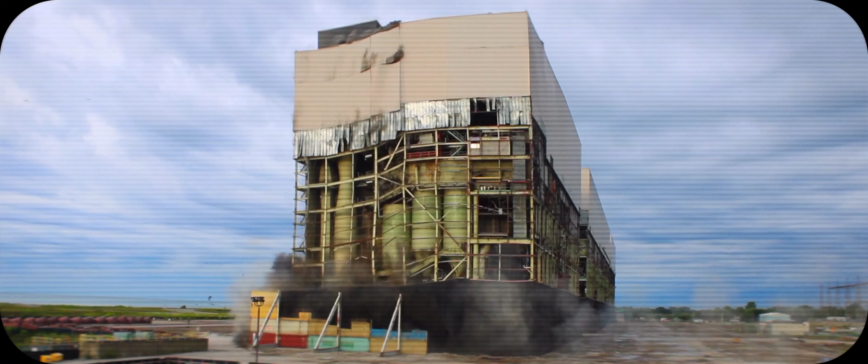Delsan has been at the forefront of the demolition industry for decades, with a long history of successful projects. Only 2 years ago, they worked with Ontario Power Generation to implode the colossal decommissioned Nanticoke Generating Station. In the 2 years since the successful blast, the team has been hard at work on a new project that was previously put on hold, the Lambton Generating Station.

I'm Monica Dedick. I am the Senior Estimator Project Manager and the Assistant Project Manager on the OPG Lambton site. On site, we will be control dropping 4 boiler structures, 3 stacks, the North Stack, South Stack, and Wet Stack, as well as 2 SCR structures.

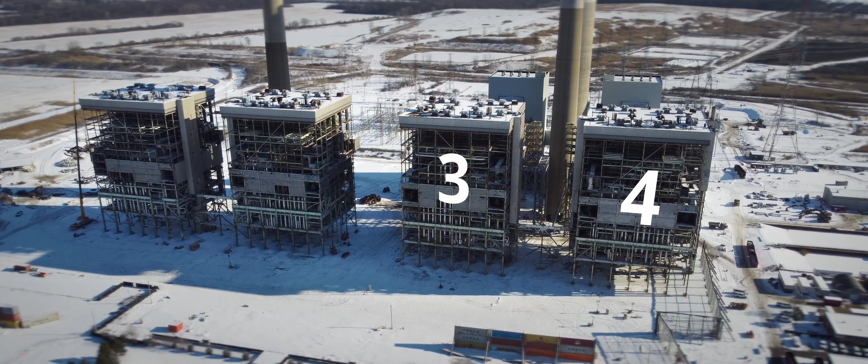The control drop will start with boilers units 4 and 3, then units 2 and 1. Once boilers 4 and 3 are control dropped, then the stacks will be control dropped one after the other. The last stack to be control dropped will be the North Stack.

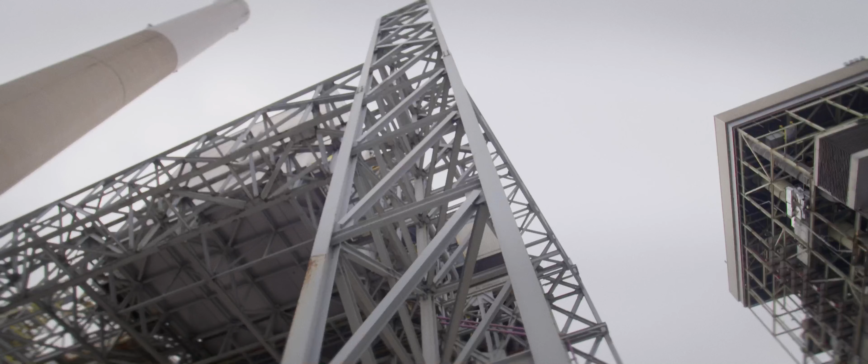My name is Paul Montero. I'm the Health and Safety Manager for Delsan AIM Environmental Services. From a health and safety perspective, this project brought in a lot of unique challenges that we never faced before. This is a very challenging job to this date.

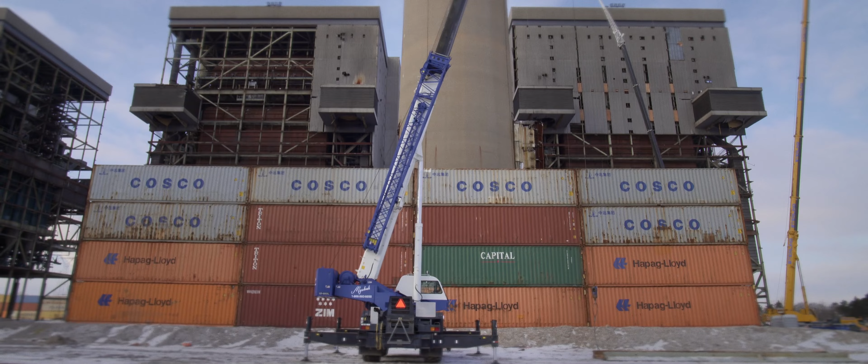We've spent the last year pretty much just cleaning and abating and removing hazardous materials and demolishing some of the buildings that were left behind so that we can make room for the implosion that's upcoming.

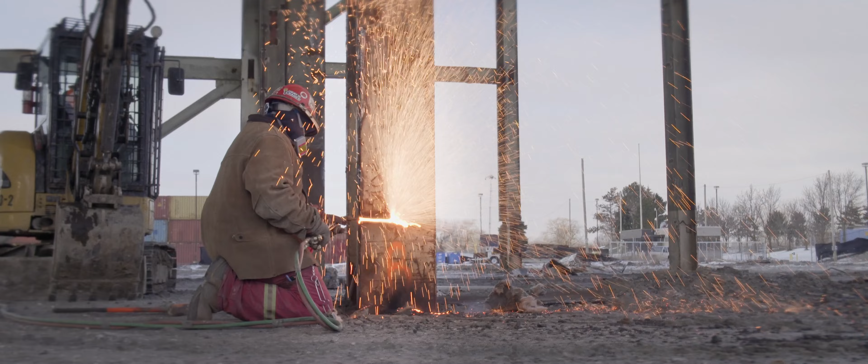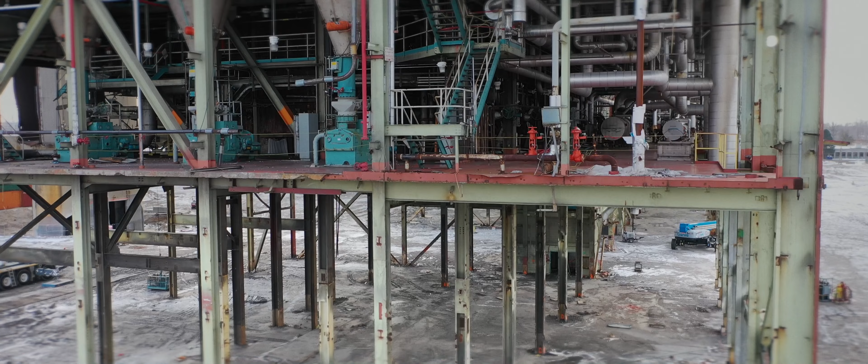Over the course of the last 11 months, Delsan has taken pre-blast site preparations to the next level. From the installation of C-can barriers and a reinforced fencing wall to help minimize the flying debris, to an extensive vacuuming out of all 4 boilers to reduce the fly ash after the blast. Delsan has also decided to leave the absorber building standing to protect a crucial switchyard that provides power to the community.

As Delsan preps the site, their subcontractors, Rakowski Energetics, have already planned out the sequence of the blast and are installing their carefully designed explosives. I'm Tristan Rakowski. I'm the owner of the Rakowski Group along with my 2 brothers. We're here today as Rakowski Energetics, which is our explosives division, preparing this project for Delsan AIM.

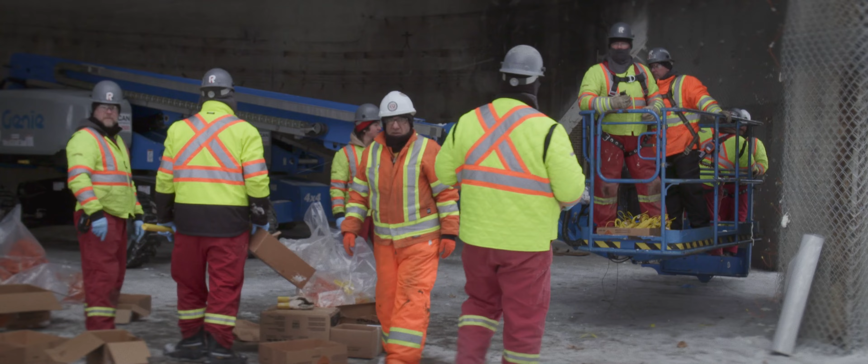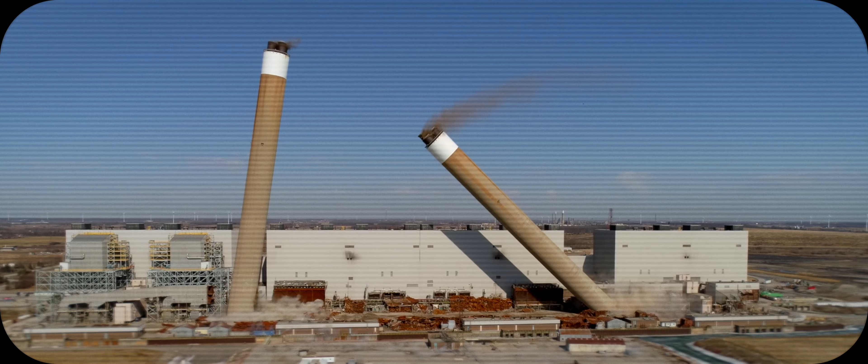The Lambton site's unique because all the structures are still standing. Most of the time we would do this in a staged process where we'd maybe knock over the boilers and we'd follow up with stacks. But there are some challenges here with the way the site's orientated, our close proximity to other stakeholders, neighbors, the United States border. So we've elected to do it all in one shot, one dust event rather than 2.

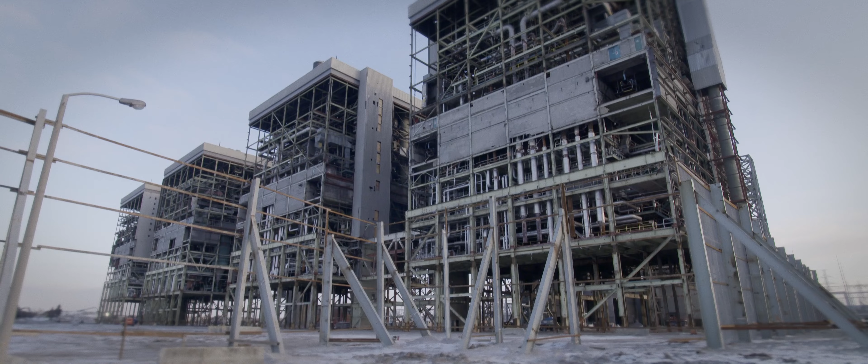So we have 9 separate structures that all need to come down, and we've sequenced them to come down in about 30 seconds. The sequencing is the most complex part of it. We have to detach those structures in a few milliseconds so that the boilers roll away. Then from there, we're actually attempting a new technique of walking a structure, which is walking the SCRs in a horizontal plane away from the stacks to open up a path for the stacks to fall.

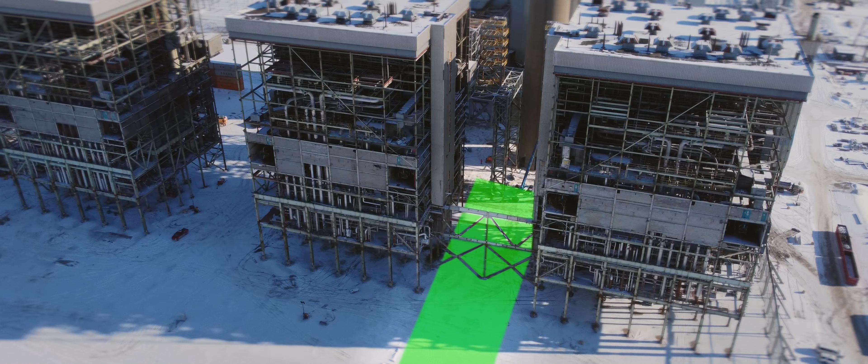My name is Ray Jambach. I'm with Englobe Corp. This is a big event. This is probably one of the largest projects we have done. We are confident that we've done everything that is possible. It's been engineered over and over, and we are confident that it's going to be a success.

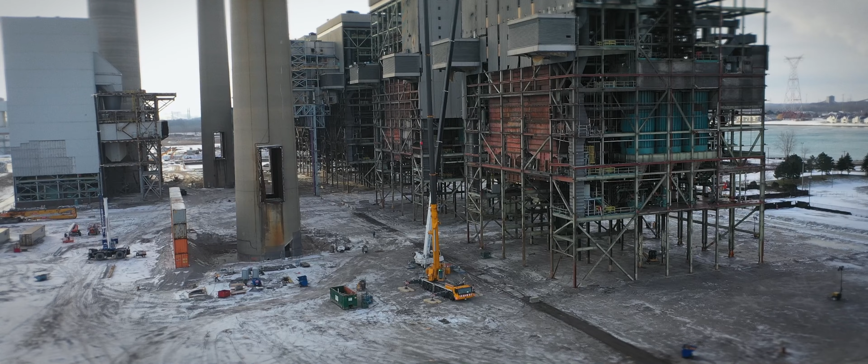So all these pipes here are the boiler. So you got 4 boilers in total. The structure around it is just to house all the ductwork and all the exchangers and everything. So it's actually an independent structure, really. This is what's helping to support the boiler. These boilers are a suspended boiler.

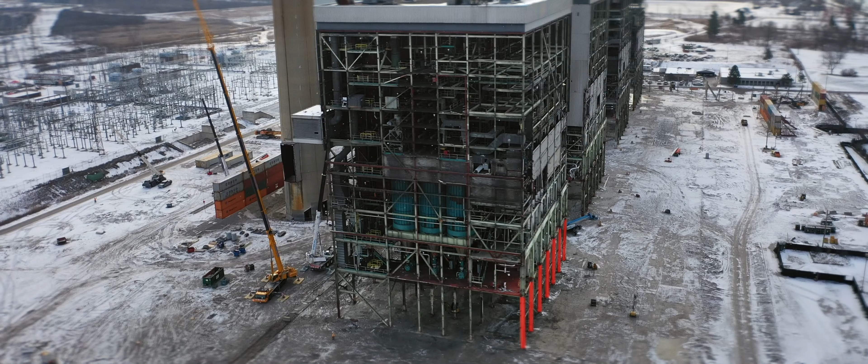So the shaped charges are actually going to be installed on the flange of the columns. So it's actually going to be installed here on one side and also on the inside. That's why we did these cutouts here in the inside flange in the web. That'll cut the flange instantaneously, while the dynamite kick charge here will actually fling the column out of the way, which will then rotate and the whole building will come crashing down.

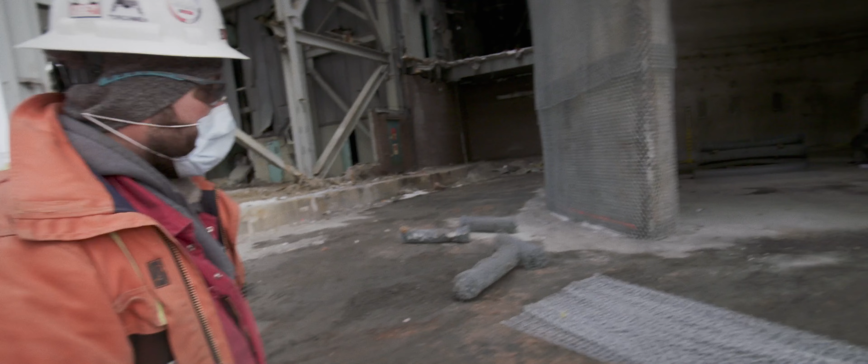This is the wet stack. This is the big one. This does not have an inner flue except for the 2 fiberglass ones inside. The walls are definitely thicker than the other stacks. And we have already drilled all the holes for the dynamite. And we're wrapping these ones up as well with the chain link to help contain the blast.

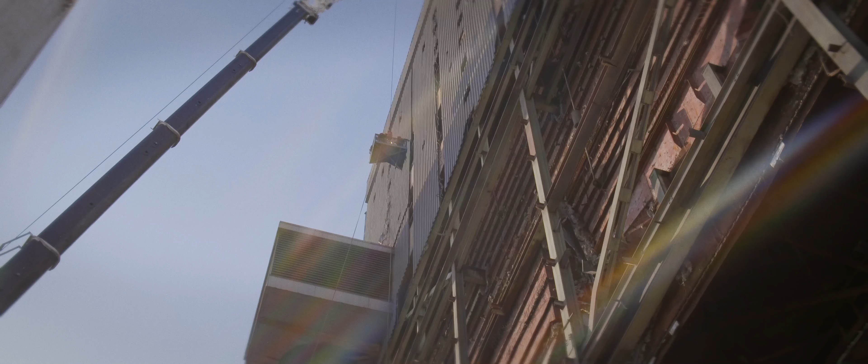The Delsan AIM crews have been working diligently for the last 3 months, preparing the boiler structures, stacks, and SCRs to receive the explosives that will be used in the controlled drop of these structures. The crews are following detailed engineered guidelines and a blast plan to accomplish this work.

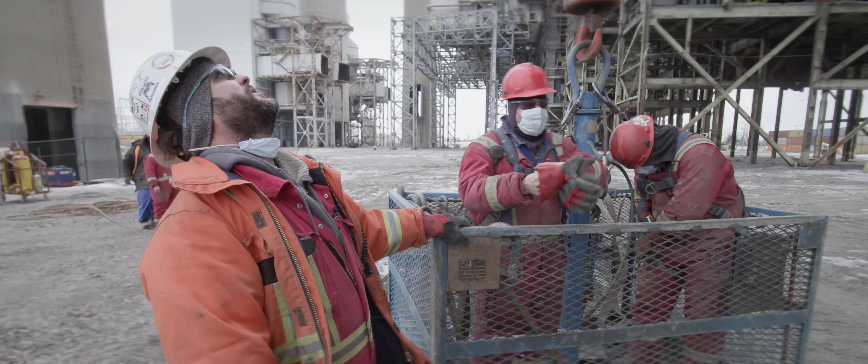Everybody's doing their part, doing the tasks that need to be done. A lot of cleanup, a lot of double checking and making sure that everything is done properly. We have an on-site engineer that is constantly here full-time, checking to make sure that all the procedures are in place and everything's being followed.

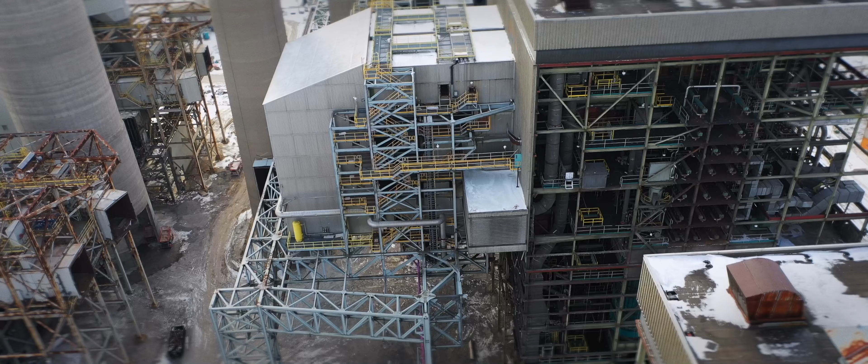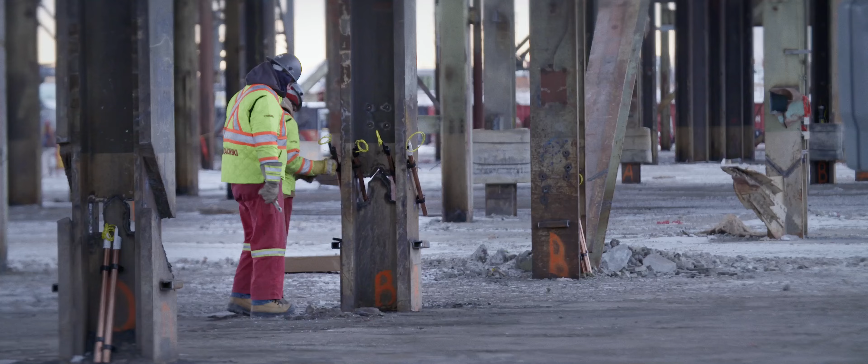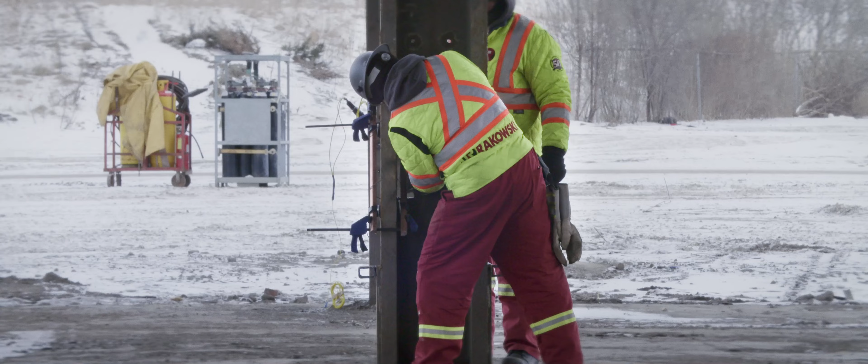The prep work required for this project is almost as daunting as the building itself. The boilers, SCRs, and stacks all require unique attention from the team. So we're just back on boiler 1, putting the charges on right now. There's 4 rows of columns that'll be blasted. Some of these bigger ones are so thick that we actually have to do double opposed charges, which means 1 on either side and the jet meets in the middle in order for us to cut the thick steel.

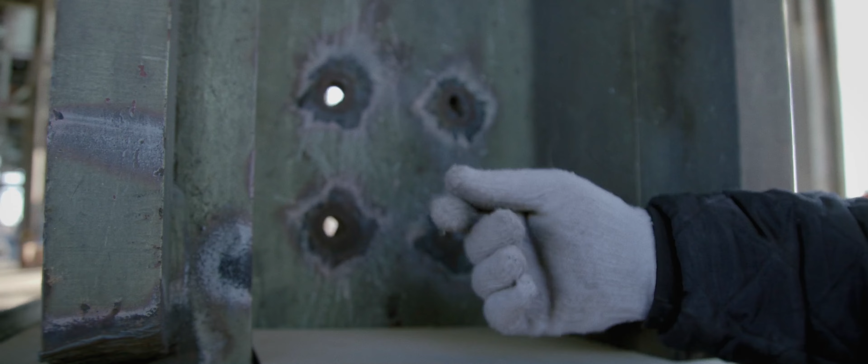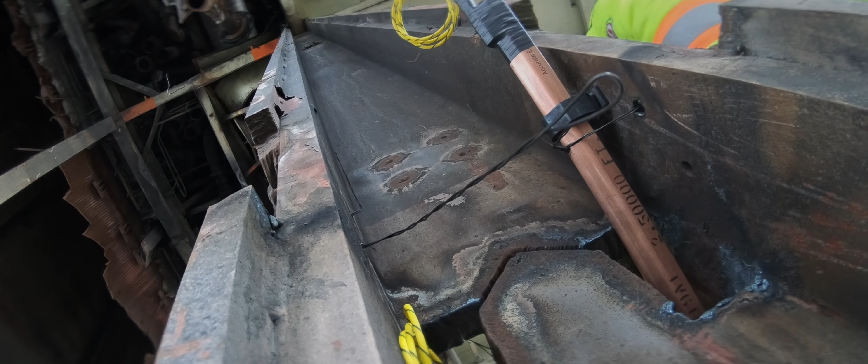One of the issues we have when deciding how to blast this, when you have columns that are this large, when they're laminated like this, there's actually a couple issues that we have to address. One is that the overall thickness is simply too thick for us to find any product on the market that'll cut it, even when we put a charge on each side. The other issue is that when it's laminated and it's not one solid piece of metal, then anytime you ask an explosive jet to cut through there, that lamination significantly decreases the effectiveness of the explosive itself.

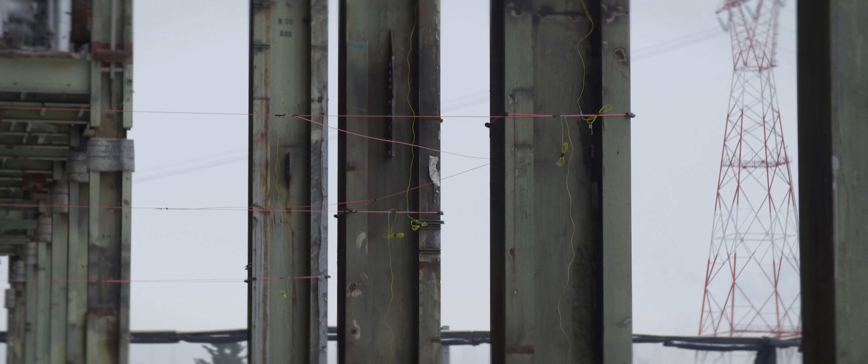In order to overcome that, Delson has scaled off the outer piece of steel, which allows us then to deal with the interior piece, which is something that the explosives on the market are able to cut. A layman can look at it and understand that it was built extremely sturdy, and the steel here is absolutely remarkable, how thick it is and how big it is. So to take it down is going to be a fantastic opportunity for us to showcase our skills at Rakowski Energetics, and for Delson, the overall project is a real feather in their cap.

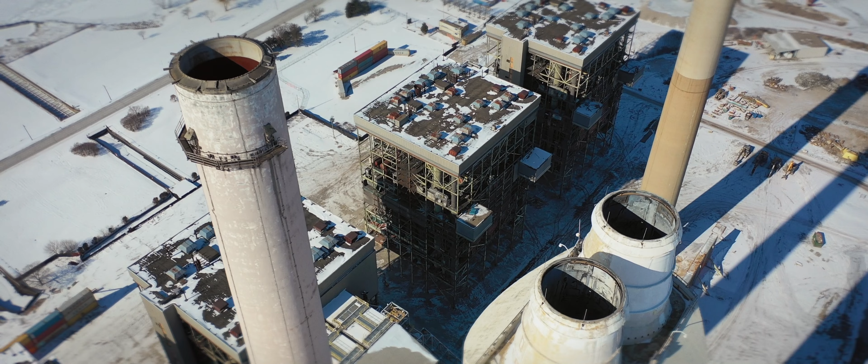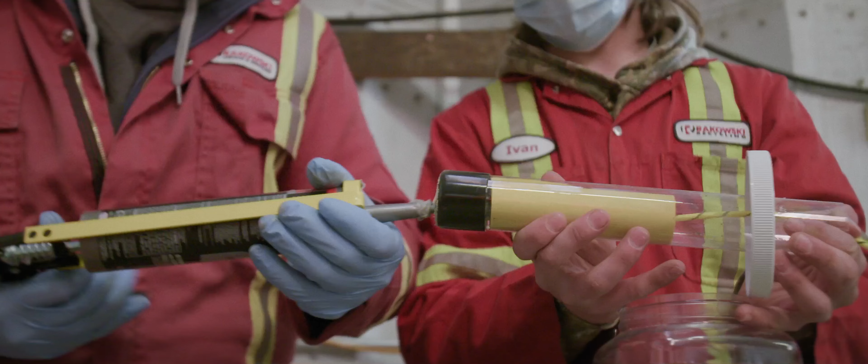I'm Bob Epps. I'm one of the team members here with Rakowski Energetics, part of the United States division. The table behind me has some very interesting tools on it. Part of the dynamics of the Rakowski Energetics team is that we've brought some tools from another explosive industry into this demolition industry. What we have is a bottle filled with a liquid, and we put a small amount of explosives in it, and it helps kick different portions of the beams out of the way to ensure that they are displaced and the building will fall.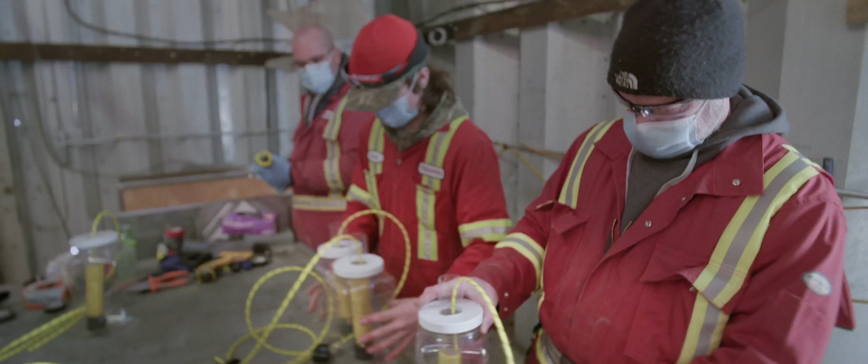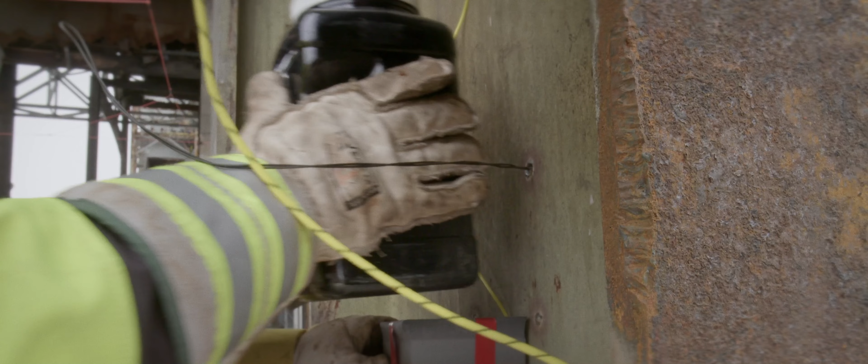It is somewhat of a tedious process. We have to take the bottles, put a couple of pieces together, put a charge inside the bottle, make sure that it's filled with the liquid to the right amount, seal it so it doesn't spill, and then move it to the building and place it in the structure accordingly. It's very complex and very unique, and the whole thing's going to take a matter of seconds to fire off, and then they'll all come down. I haven't seen very many jobs where this many things are coming down at once.

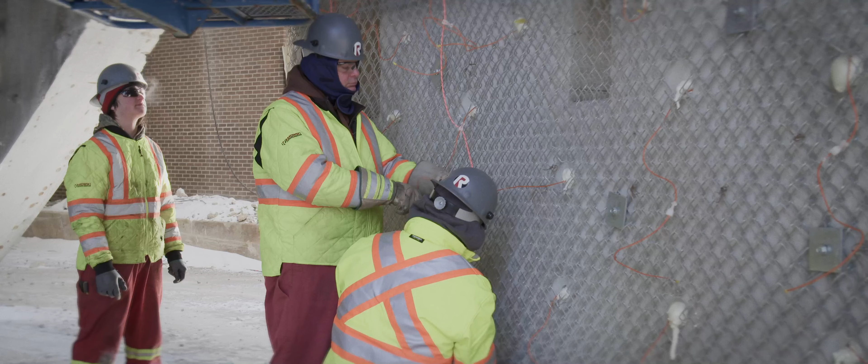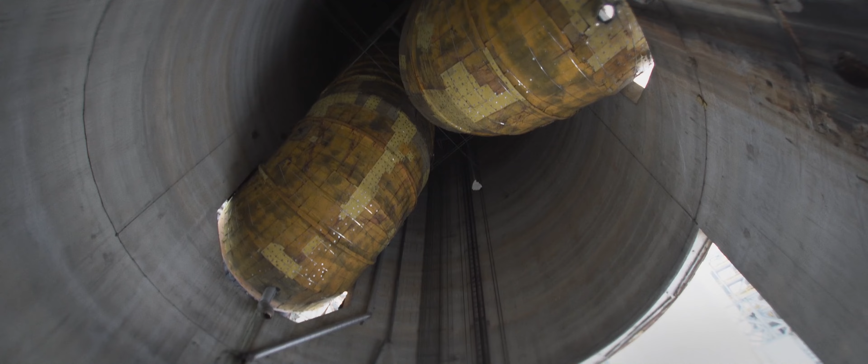Rakowski also needs to install the explosives on all 3 stacks. To do this, a series of holes are cored out to fit the prescribed amount of explosives. But more focus lies on the wedge cuts at the base of the stacks. These cuts, designed by AIM Delson, are crucial to direct the fall of the stacks and only accept the prescribed amount of explosives. When the charges go off, the concrete wall will disappear and the stack will fall as planned.

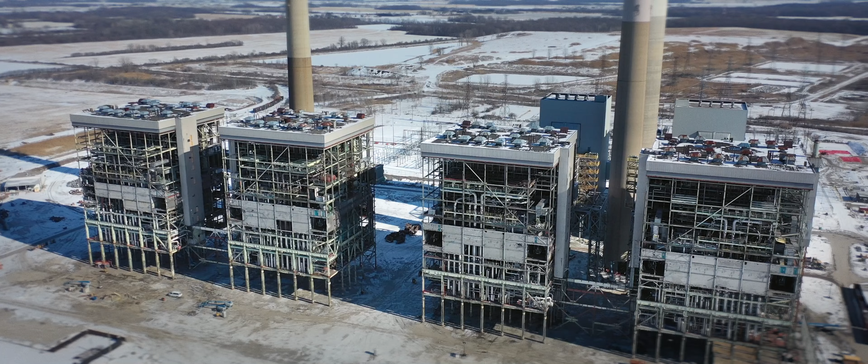Going good. It's very cold. For the international members of the team, it's far colder than we're accustomed to, but it's going well. We're having a good time. We're working hard, long days, but we're making good, steady progress every day.

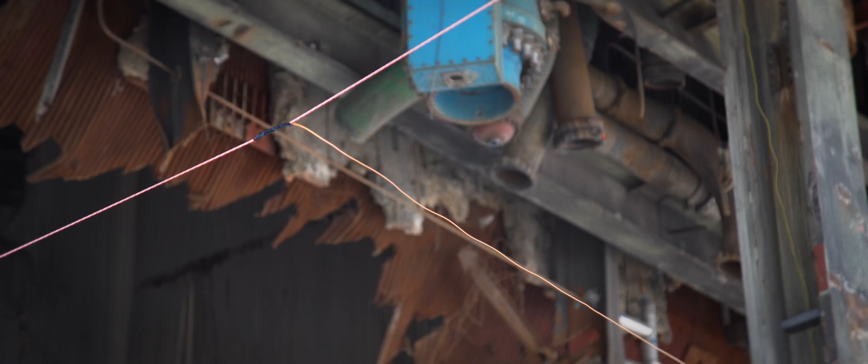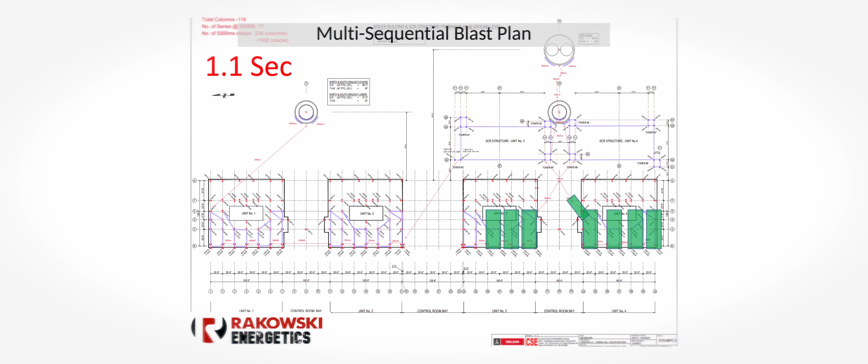How we set this up is we basically group together columns in 6 or 5 units at once. So that's what you see, this pink ring that goes all the way around. Between the groups, there's an interruption here. That is another detonator. So what happens is you're going to have a group of columns go off. Then there's going to be a 300 millisecond time delay before it fires the next group. So that snaps off, signal gets put in the box in 300 millisecond intervals all the way across.

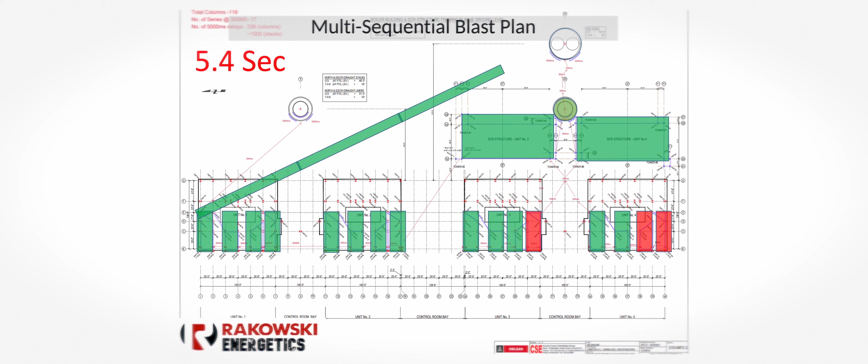So that 4900 is already starting. So imagine after 4900 milliseconds elapses, it's bang, bang, bang, bang, bang, bang, all the way across. Caps are cooking in the hole. Then the groups start energizing in 5 and 6 column groups, setting off the explosives. Mostly that's to eliminate air overpressure. We're surrounded by a lot of homes.

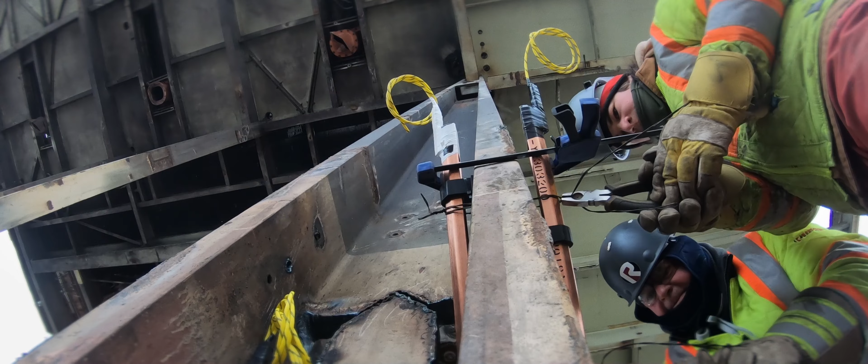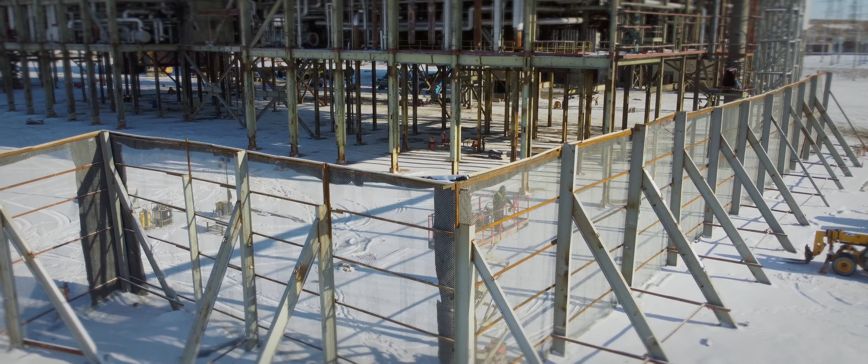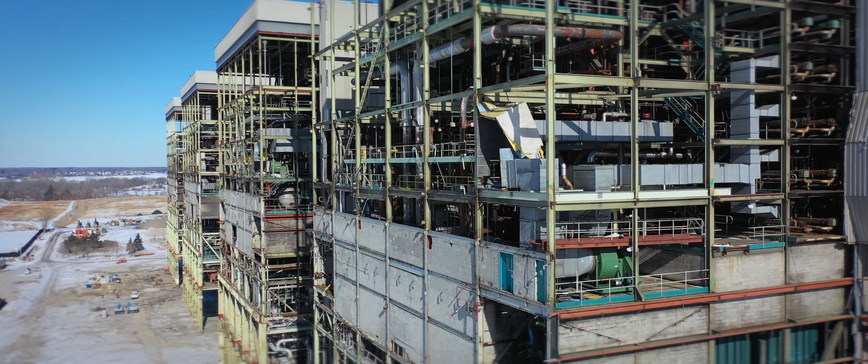When it comes to the implosion and dealing with dynamite and shape charges, there's a lot of health and safety related issues that we encounter. Not only the storage of the explosives, the handling of the explosives, ensuring that we secure the explosives, secure the buildings that have been loaded with dynamite and shape charges. So we've had to have 24-hour security, patrolling the buildings just to ensure that we keep the buildings safe for everybody, including the community around.

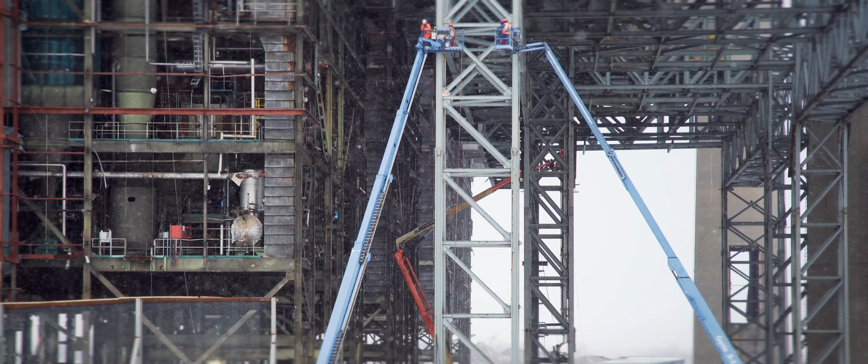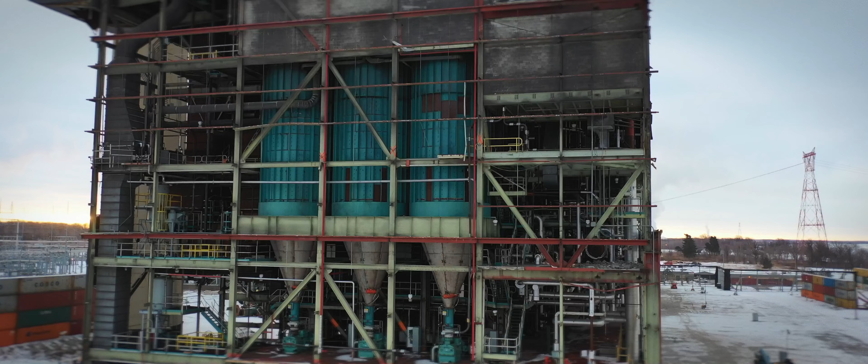My name's Dave Dunsworth. I'm the worker health and safety rep. Our biggest thing is working at heights. We have everybody tied off 100%. We have the guys working up in the man lifts. Everybody's done their inspections on that. And we have a 1-week window. All our permits are in place. The local emergency services have been alerted. They've came in for their tour. And the Ministry of Labor's been on site. Everything's been inspected. Everything's been pre-planned. And I'm stoked and I can't wait.

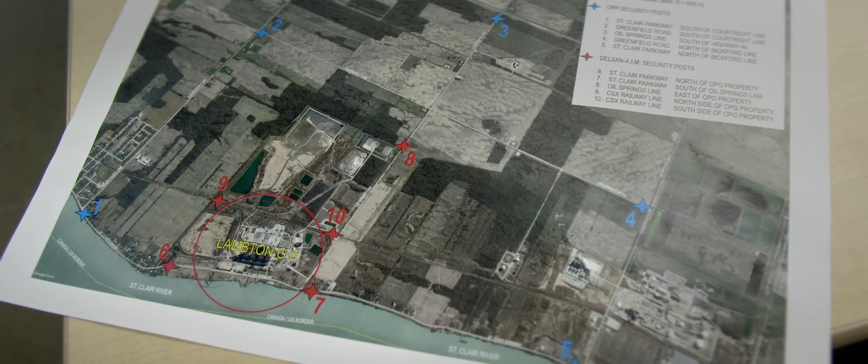On the day we're going to blast a building, we have to cover a vast area. So we were going to have to shut down a lot of roads and position a lot of checkpoints to ensure that nobody crosses the boundaries, as well as coordinating with the Coast Guard, considering that the St. Clair River has ships going up and down through the winter.

We need proper winds, and that's anything over 20 kilometers an hour up to 30 kilometers an hour to perform this blast. The winds need to come from the northwest, and that's going to ensure that we are not going to have a dust cloud go over any residential properties or any properties that might be affected by the dust itself.

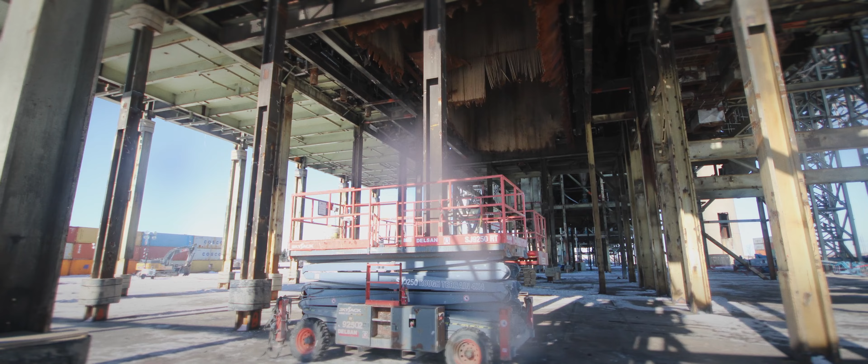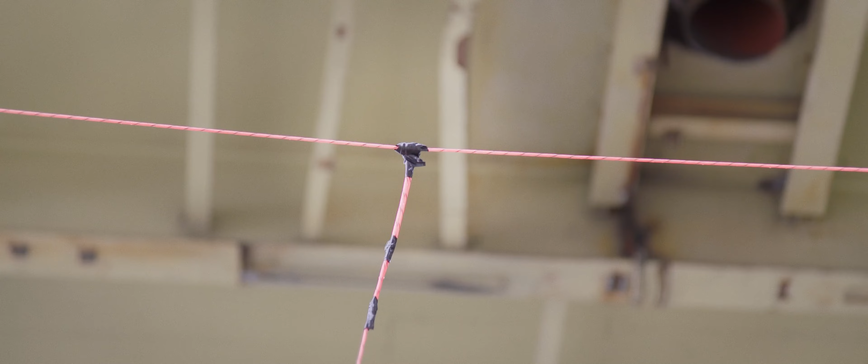As the week progresses, the team completes the last of their cuts and places the last of their charges. The structure is ready to blast. However, the weather has different plans. The winds are not currently blowing in the correct direction. Even though the charges are set, this imposing facility must sit still and wait.

We got the weather that we were looking for. We have the wind directions that we were looking for. We have the degrees we were looking for. Guys, we're not gonna miss this window. We're gonna go for it. Tomorrow at 7:30, we're gonna blast.

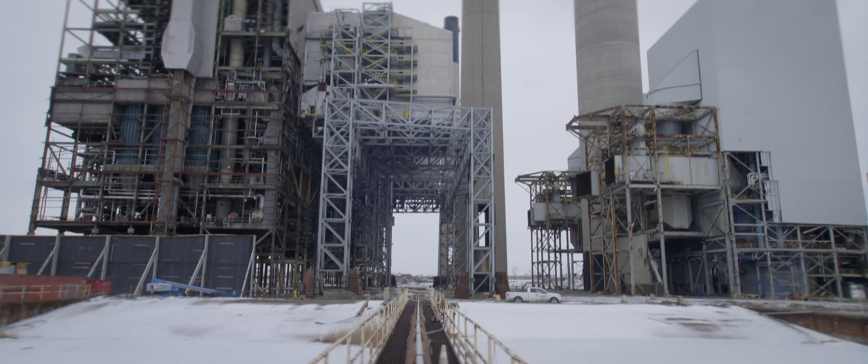The last 2 weeks, we've been waiting for this day. We've been putting it back, pushing it back, pushing it back. Finally, we have the exact winds we're looking for, the speed and the degrees. Everybody have a good night's sleep, rest. It's going to be a long day tomorrow.

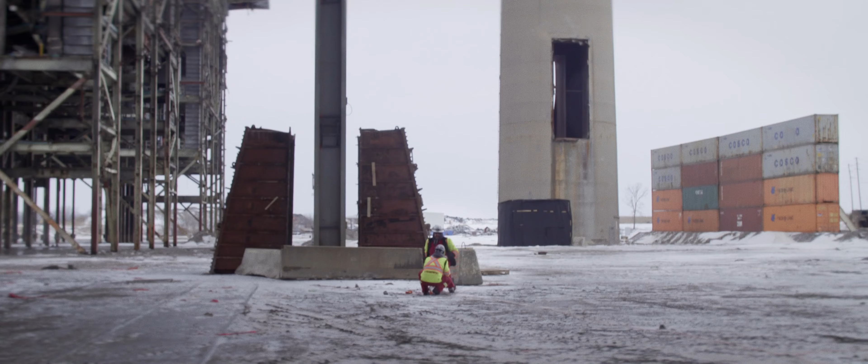The blast is scheduled for tomorrow. So our main role now is the energetics team is walking the entire site, go and check every single connection. There's literally hundreds. Check every connection, make sure the wind hasn't made any of them come loose. Double check the charges, that they're all in place. The more times you can check it, the better.

By the time blast day comes, there's really no reason that there would be any error with regards to the explosive setup. So at that point, it's just up to the explosives to do their job and the building to come down. As the sun sets, the Lambton Generating Station completes its final day. Early in the morning, the team returns to activate the detonator.

Okay, so the weather has been consistently good. Right now it is 311 at 26 kilometers with gusting winds, so we've got the winds we want. And I want to just ask OPG, are we good to continue with this? Yep, I think we're good. Fire department is ready? Fire department's ready. Okay. Tristan, the big guy. Yes. Are we good? Yep, site has been inspected, we're go. Okay. Good luck to everybody, and let's have a successful blast. Okay.

We got the police at barricade 3, Brian. We're gonna block her off now. 10-4, close off all the stations. Close off all the stations. All clear, station 1. Station 2, all clear. Station 3, all clear. Station 4, Station 5, all clear, boss. Station 6, yeah, I'm clear. Station 7's all clear. Station 8, all clear. Station 9, all clear. Station 10, all clear.

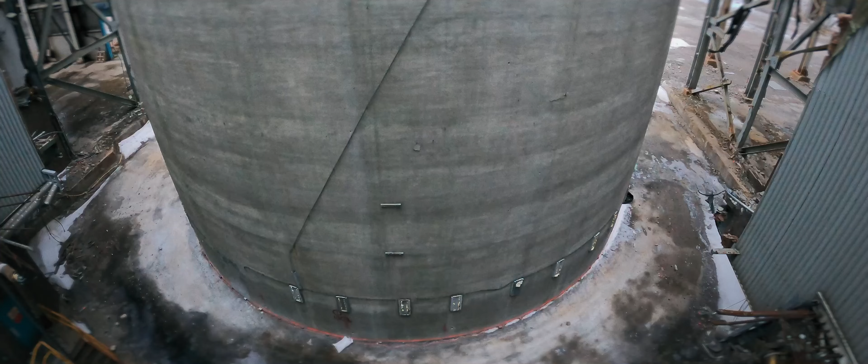All right, here we go. Last 10 seconds in 10, 9, 8, 7, 6, 5, 4, 3, 2, 1, fire.

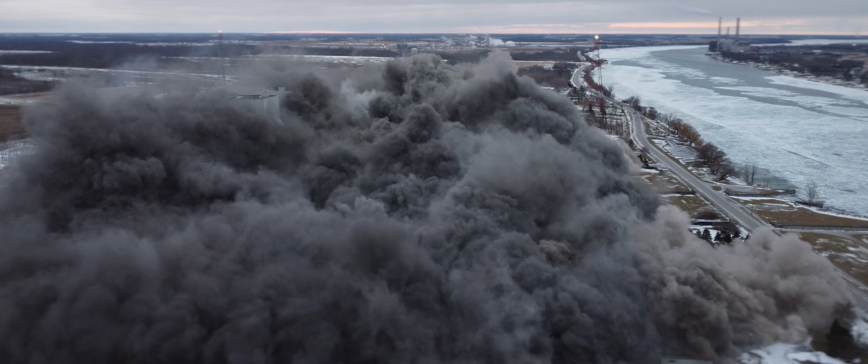All stations stand by.

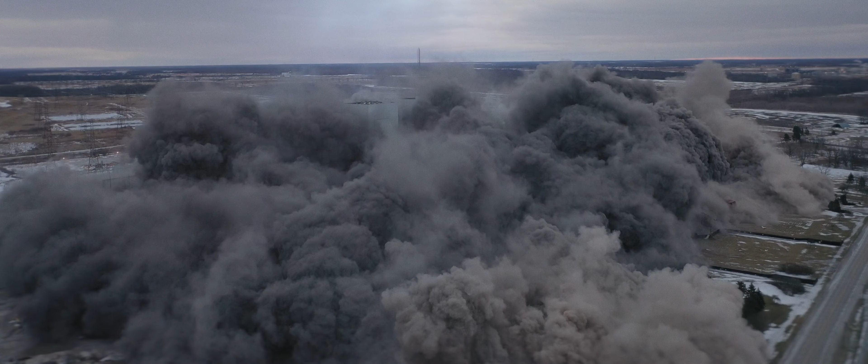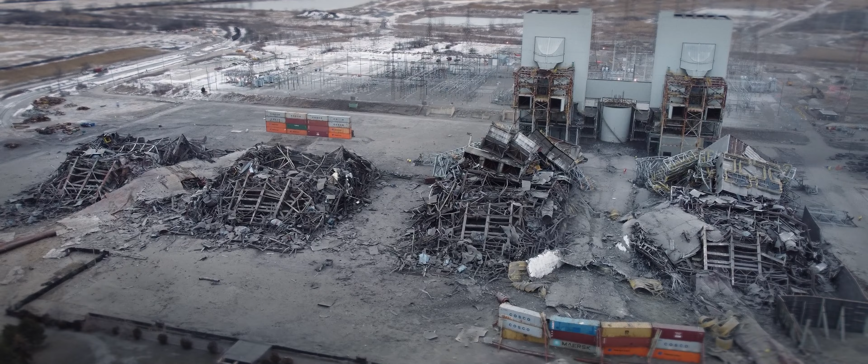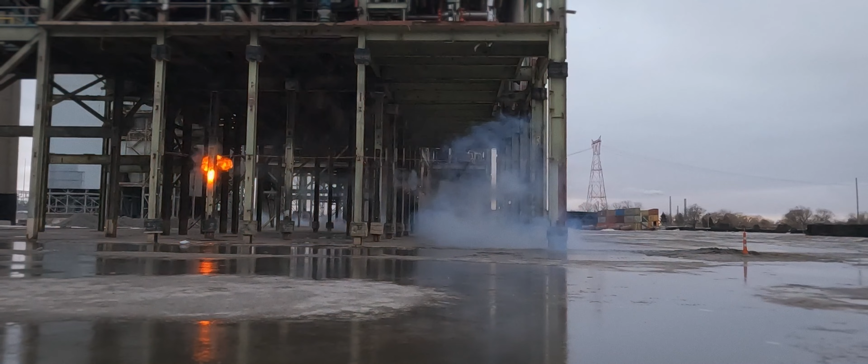So we had a lot of moving parts on this blast design, and the goal was always to do this in one shot. It brought a lot of complications to it, the sequencing being the trickiest one. Having 9 different structures going in 7 different directions took a bit of engineering, and Delsan team and CSE did a great job. Once we have the initiation, you're watching all the detonations is what you're focused on, and making sure the buildings are rotating in the proper directions, and we had that.

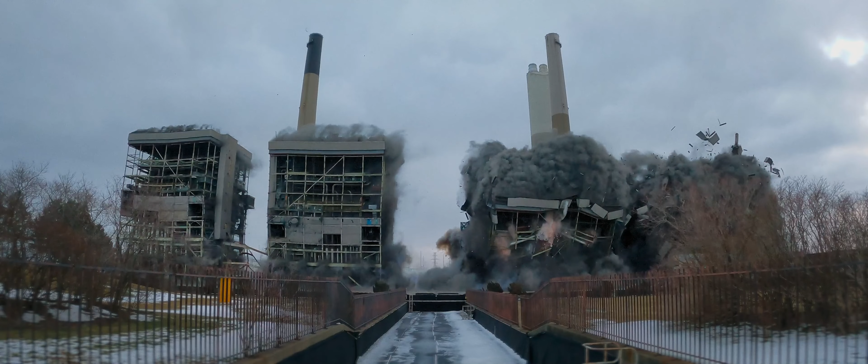We had a little hesitation on one SCR. We had the charges go off, but we didn't get the penetration we were asking for. It was a very heavy column. It doesn't matter, the wet stack did wipe it out, so everything's good and safe. We're very pleased. It was a long 30 seconds, but again, the results are on the ground.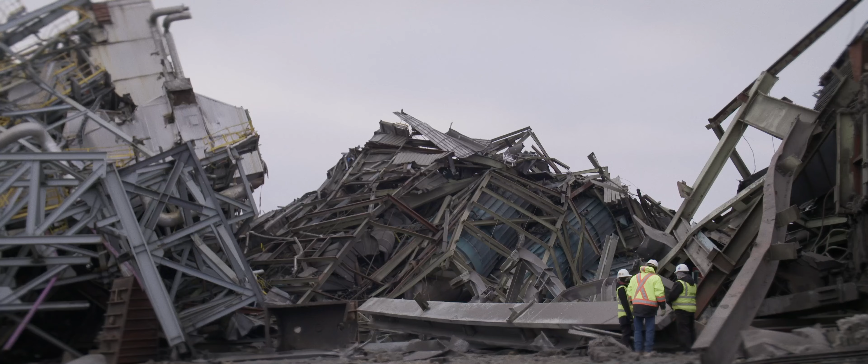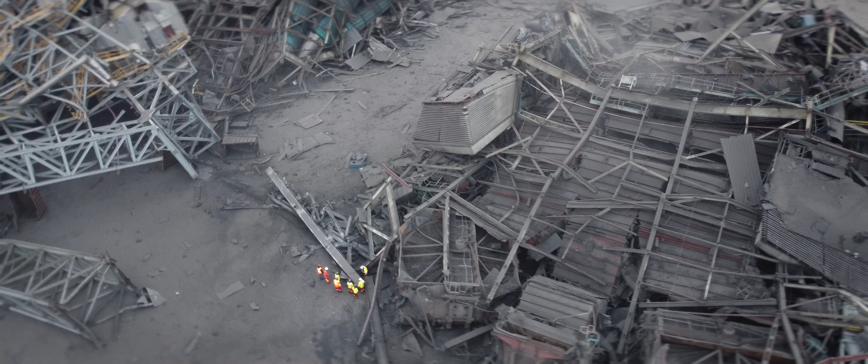The best team in Canada. Delsan and us share the same philosophies on site, and it makes them a real pleasure to work for. Very professional, very safe, and organized. Some of the best professionals in the blasting industry on earth here.

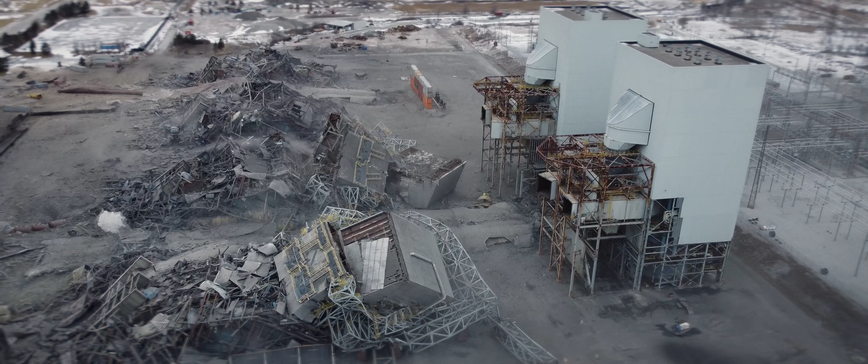The blast went excellent. My heart was racing the moment when we started the countdown as I engaged the Energizer. You know, 1 year of work to prep everything, reduced to 30 seconds by a push of a button was unreal. Beyond the sequencing of the blast and the strategic installation of the explosives, AIM Delsan's meticulous data analysis and diligent planning made this blast a massive success. The boilers and stacks fell as planned.

The blast was very exciting. It was a huge event for everybody. This plant meant a lot to this whole community for over 40 years. It was very exciting and somewhat bittersweet to see it come down, but they executed the plan exactly as we had planned it all, and I'm very happy it happened the way it did, in a safe manner, environmentally friendly manner.

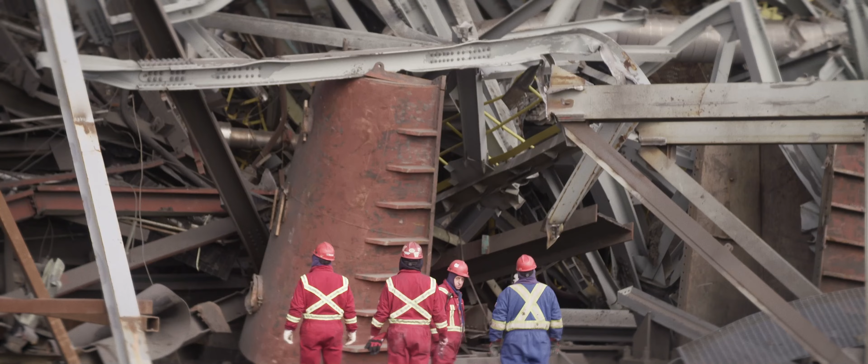Delsan definitely has a professional attitude to everything that they do, and they have a lot of experience. They helped us decommission and demolish our Nanticoke site, which we're very pleased with their performance there, and they've done the same work here.

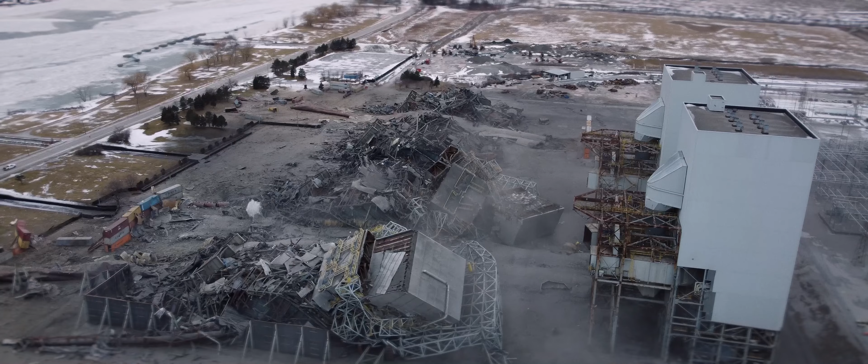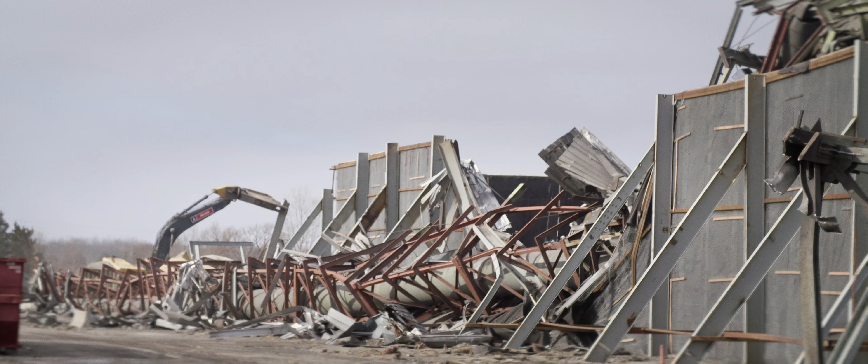We look at it as a challenge, and there's just a lot of good stuff in there that we're going to go through, and it's part of the job. It's what makes this job fun. With all the green energy going on, recycling is definitely at the forefront of that, and we're happy to contribute.

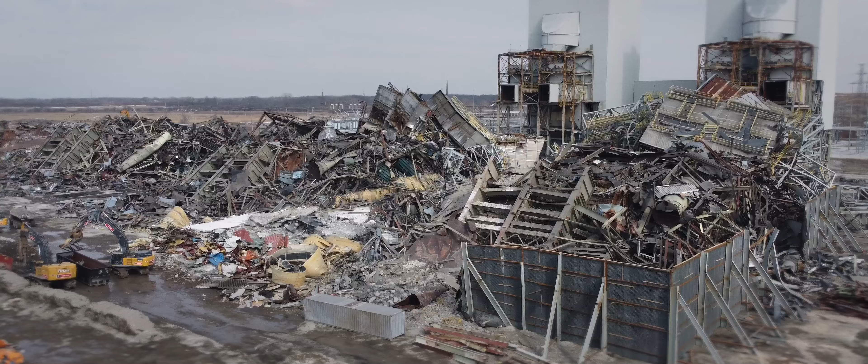We have rail car access. We're going to be having trucks. We have a truck scale, we have a rail scale, we have a shuttle wagon. We load each car by material, by grade, to the destination that it's going, whether it's the mill direct locations, whether it's our recycling facilities in Montreal, Hamilton, Quebec City, to be broken down even further to be then recycled at other outlets. You could say it's a mess, but it's actually not a mess. It's a very organized mess.

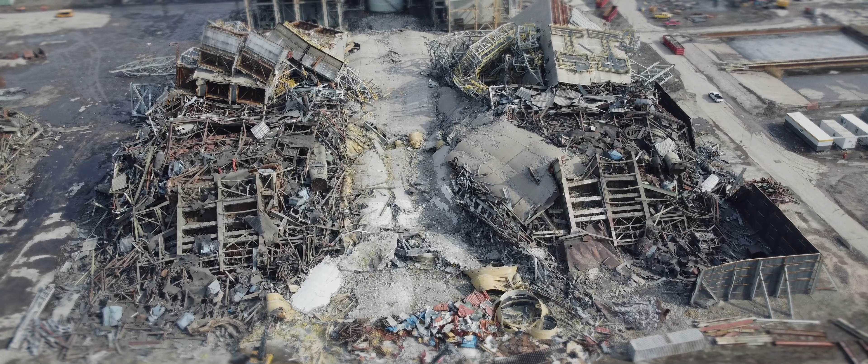Also, the stacks came down. We have about 30,000 tons of concrete to process. We have to crush it to 2-inch minus, and that material is going to be reused on site to fill holes and level the site after we're all done.

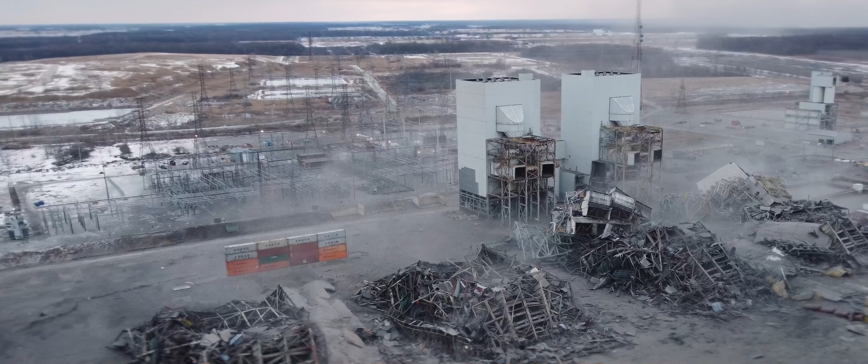The remaining structures that are still there, we left them there for a purpose, to protect the switch yard that is behind those two buildings. Because if we shut down that switch yard, there would have been a lot of people mad at Delsan because they would have lost power in their houses. So that's the reason we left those two buildings there, just for protection. Once the boilers are moved out of the way, we are going to control drop them, but it won't be with explosives, it will be with our machines.

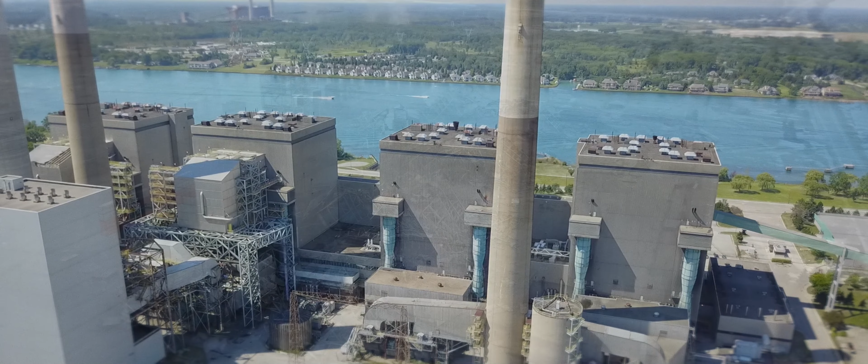So just to wrap up, I'd like to give a thanks to all the OPG, Ontario Power Generation employees that worked here for over 40 years, all the employees who continue to work here, as well as all the retirees. We really appreciate all of the power and energy that they provided to the province over the past 40 years, which helped us build a lot of the industry and infrastructure we have in the province today. So big appreciation for all of that. Thank you.

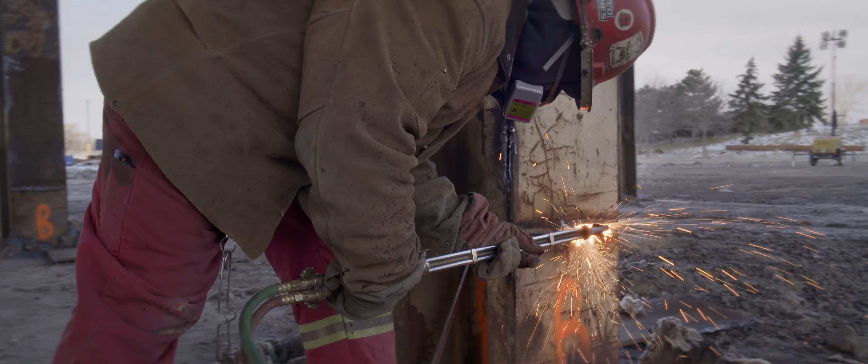When we look at the implosion footage and we see how well executed it was and how everything went as planned, what a lot of people don't see is the work that's behind that in order to prepare the structure for that day. It's not just let's make an opening in a stack and drop the stack, or let's just put some charges in the building and implode the building. There's a lot of engineering that goes into that and a lot of planning as well. And in this case, like every other case we've done in the past, everything went as planned. We're very proud and happy that it was a success.